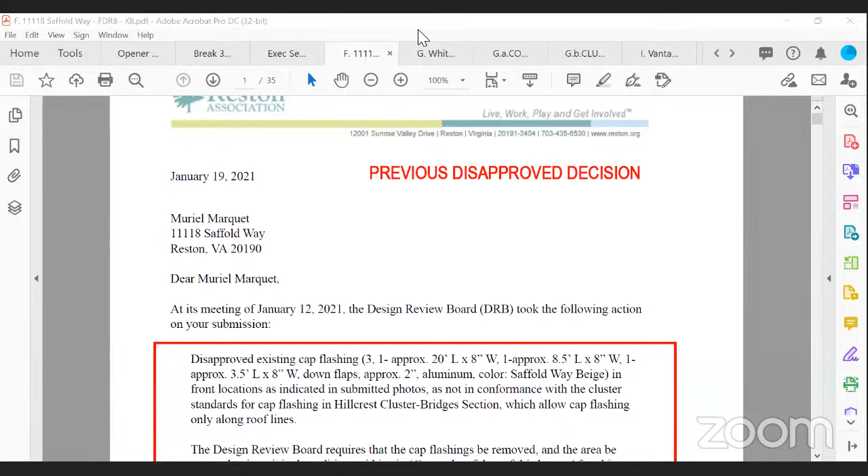The first application is Saffold Way. Is our applicant here? I'm looking for this applicant. Is it an appeal? Yes, okay. As in, looking for our applicant. I don't see her on here. We might want to go to the next one.

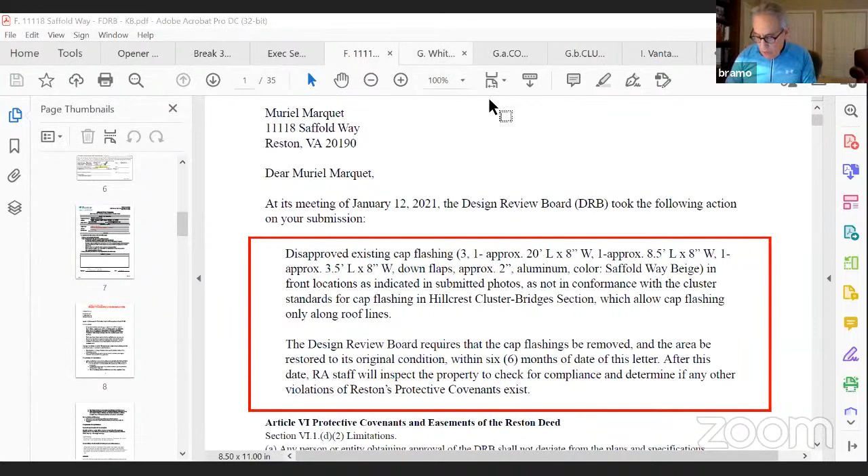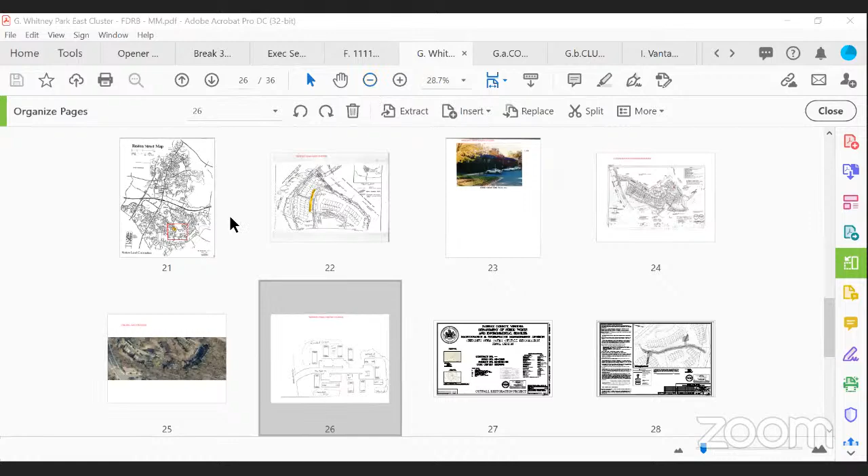Okay, we'll proceed to the next item on the agenda, which is Whitney Park East Cluster Stream Restoration. Okay, we do have the president of Whitney Park East. We're going to unmute her now.

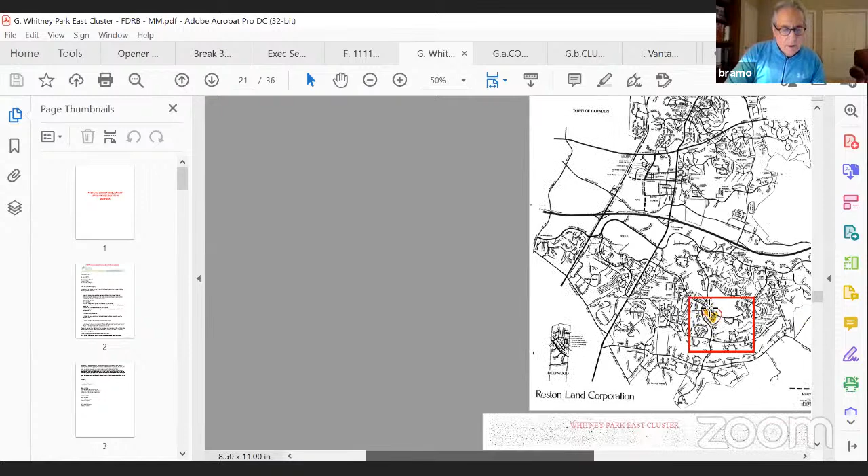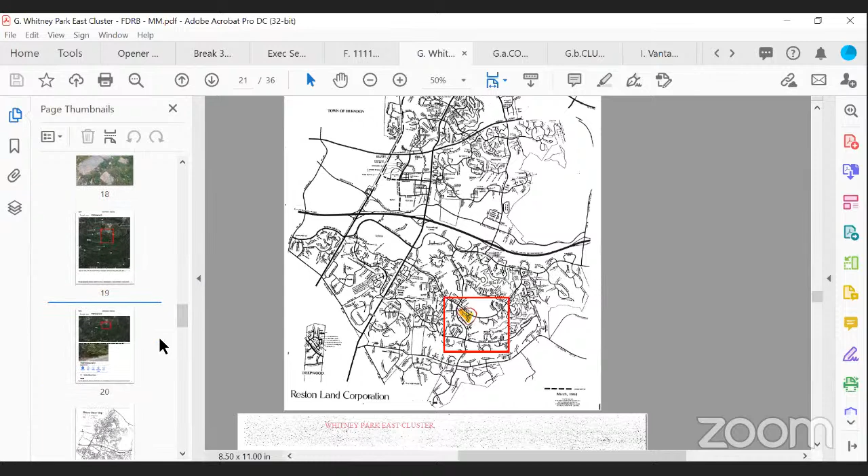Hi, this is Jackie Clark. Can you hear me okay? Yes, very well, thank you. Okay, great. And hopefully Jack Merritt with Fairfax County is also on. He can talk through the plans in more detail, but essentially the application that I submitted with the agreement of 2 other clusters is to allow Fairfax County to restore the creek.

The creek runs between, or on the easement they have between all of our cluster properties. It's been an issue really for the last 2 decades. I think even in the late 90s, the president then went to Reston and asked them to help reduce the erosion happening in the creek. A lot of the backyards of our houses are slowly eroding into that. And while this Fairfax County solution won't fully fix that erosion problem, it definitely helps the erosion of the creek.

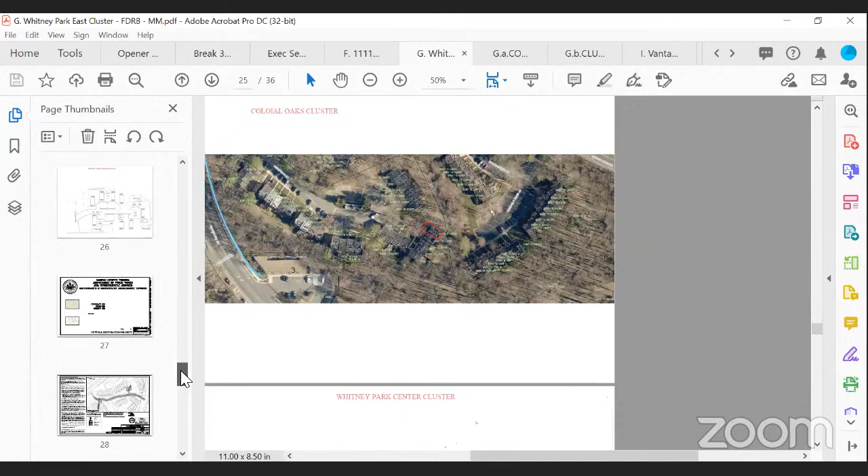It also will address some dangerous trees that are in the creek that in the past have fallen on houses or damaged property on the slopes of the creek. So hopefully it will make it safer and reduce erosion behind all of our townhomes.

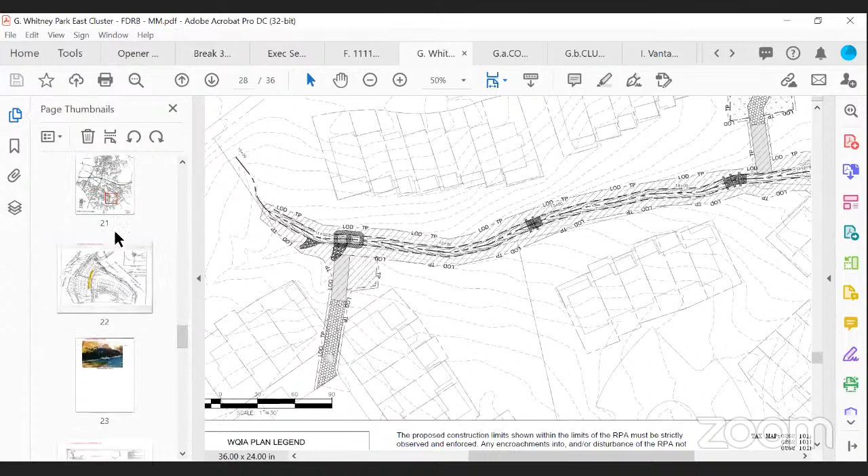You said there's going to be a representative from Fairfax County to kind of walk us through the plan? Yeah, if you can unmute Jack Merritt - he's unmuted. Hi, Jackie. Okay, yeah, I'm unmuted. Thank you all for having us tonight.

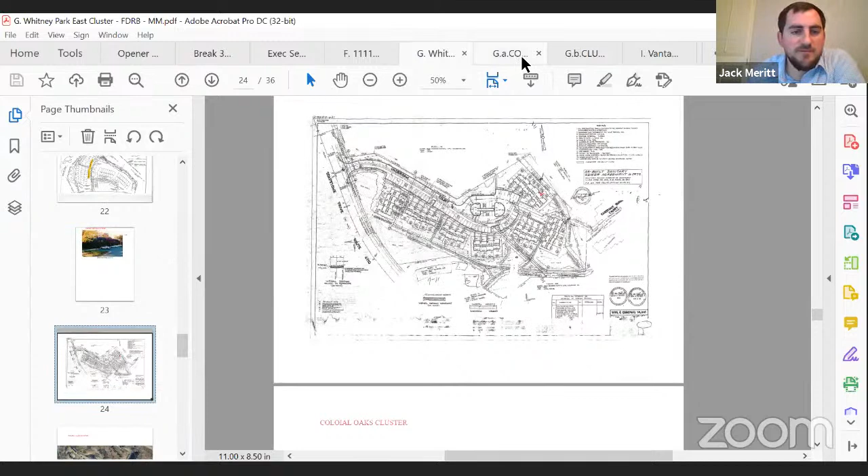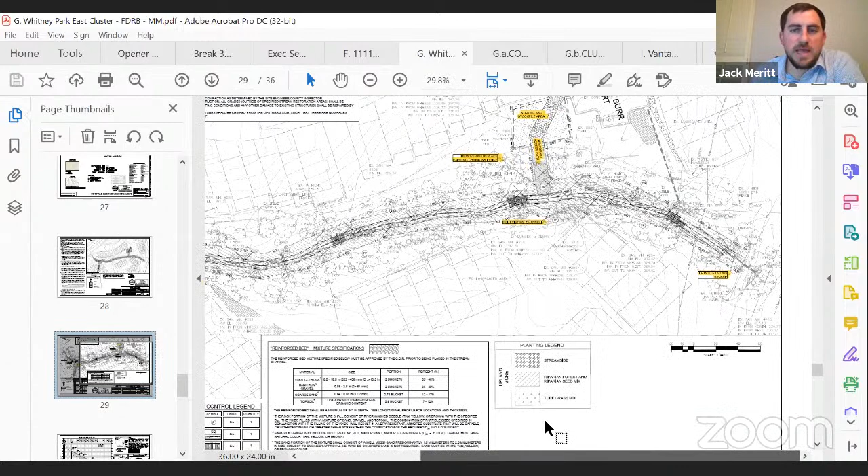If you scroll down a few pages there, I saw it a second ago. I think it's page 29, the next page. Yeah, so if you pan over a little bit more to the right, our proposed access is going to come off the end of Chestnut Burr Court to get into the channel and do the work and access the channel. We are proposing access to run up and down the channel to minimize impacts to existing trees.

We started our engagement with the community back in 2019. We coordinated and consulted with Wetland Studies and Solutions. They're also on the call this evening to do a design project for this channel.

As Jackie mentioned, there's a storm drainage easement along this channel, and this outfall restoration program that we have is part of the county's stormwater program. So this is fully funded through the real estate tax assessment and the stormwater fund that you all pay into.

WSSI surveyed 259 trees, 4 inches in diameter and greater, as part of their survey and topographic survey when they did their initial data collection in the field. We're proposing to remove 41 of those 259 trees. Most of those trees are what we would consider hazard trees, or will become hazard trees because of the construction. I know that tree loss has been an issue along this channel because of the erosion, so we've obviously taken that very seriously as part of our coordination and design effort.

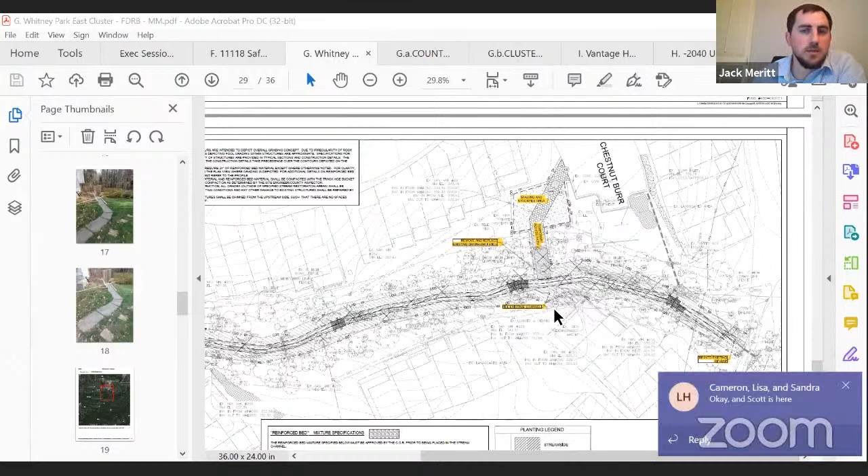Did WSSI do the initial work? Was there initial work, or is this a fix up of something already done? The initial work would have been done as part of the subdivision development, so this would be, to my knowledge, the first restoration effort along this channel.

I live in a cluster that they remediated our stream, and they did a beautiful job. So I think we're in good hands. Was that WSSI? Yes.

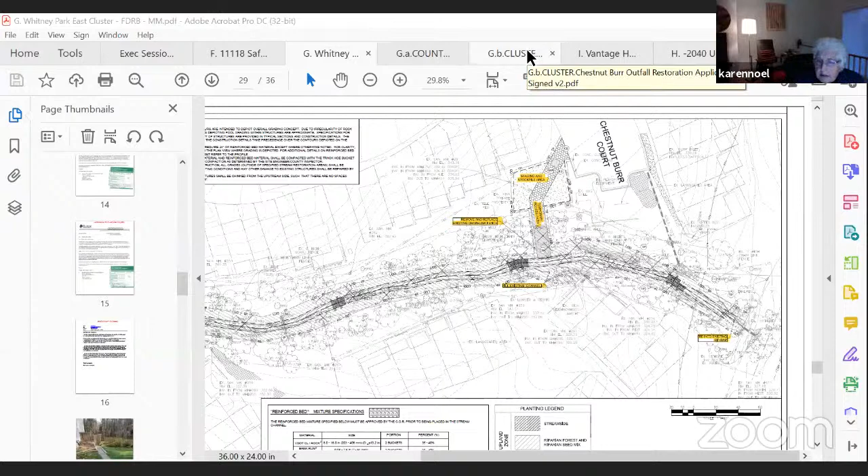This wasn't part of our original restoration in Reston, but we did take the same approach and methodology that we used at Waterview cluster behind your place. Following the restoration, everything will be revegetated with the native seed mix and 1-gallon and tubeling trees as well.

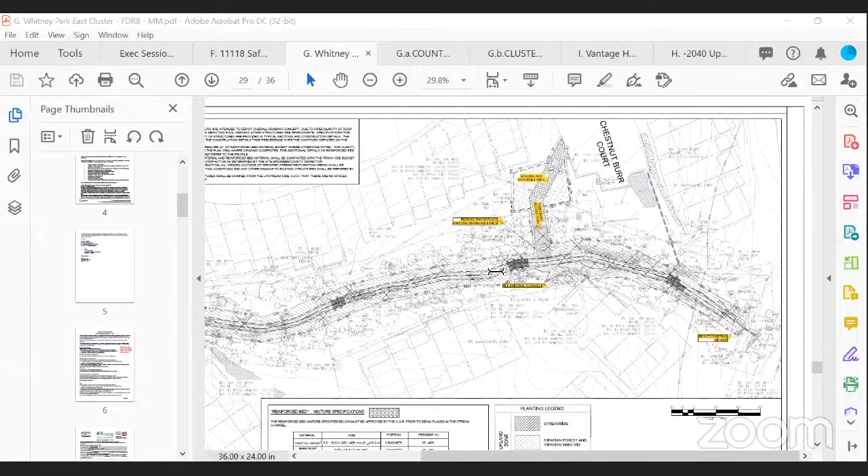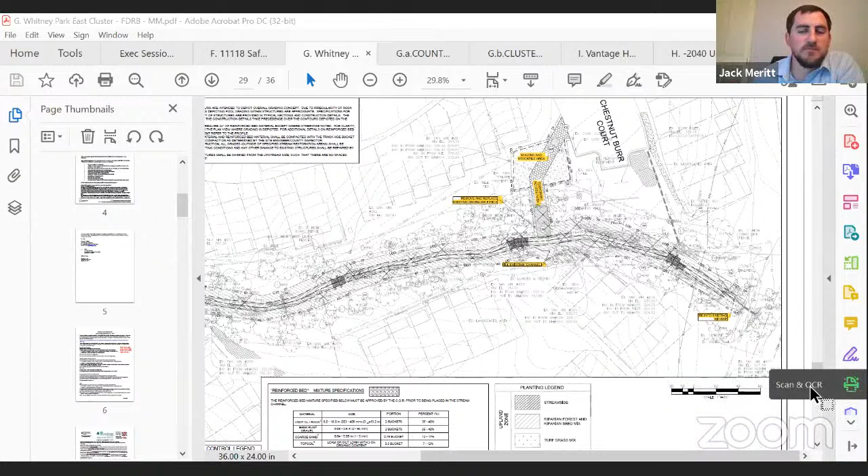How long a project is this, timing or length of construction, from start to finish? We're proposing to restore approximately 650 linear feet of outfall channel. Construction duration should take approximately 2 months.

Forgot to add that we have coordinated with the other 2 clusters whose property doesn't necessarily encompass the channel, but they're adjacent to it and close enough that it's going to have an impact on them during construction. We've engaged with them and held several community meetings to keep all community members engaged in the project.

So right now we're just looking at one piece of it, right? You're looking at the whole project. I'm looking at the whole project. Maybe if you zoomed out another click or two you could see the whole thing, but I look at it on my computer and it's in pieces.

Just for clarification, the application is for the full approximately 650 linear feet, is that correct? Yes, sir.

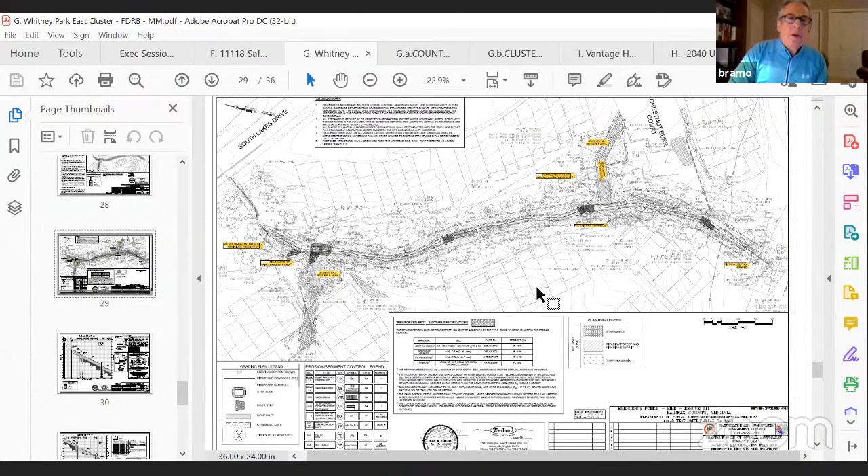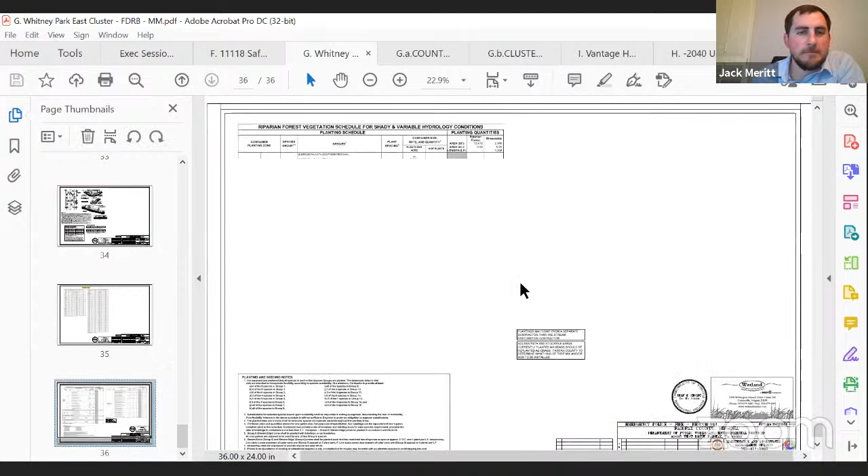Just a point of clarification, you had mentioned there would be revegetation. I think I saw a planting plan at the tail end of your package, and you said you were coming back in with native species, et cetera? Yes, sir, that can be found on the last page there, the next sheet, 36. There you'll find our seeding schedule and our planting schedule with the native trees and shrubs that will be installed post-construction.

Wonderful, and I missed it in your original discussion points, you said total removals were on the order of 40, is that right? Total removals on the order of 41, and then revegetation is 453 stems.

Wonderful, thank you very much, appreciate it. That's so that you would hopefully have an appropriate number left over after some of them don't make it. Correct, we do plant at a higher density due to natural mortality.

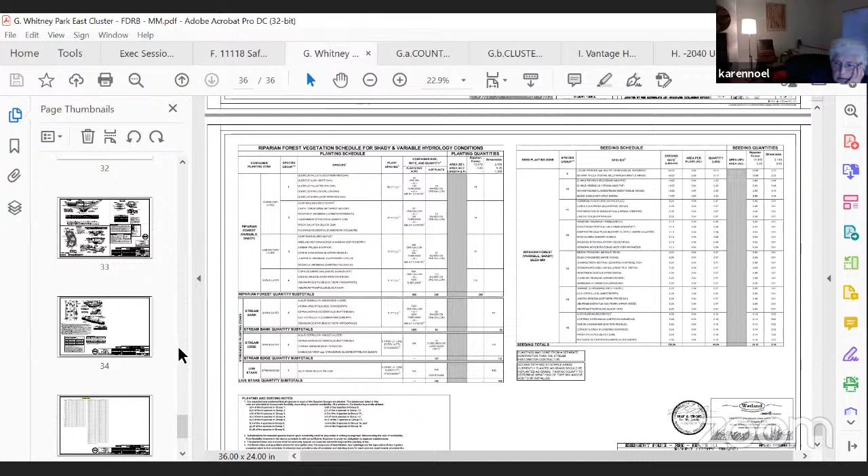This is not a stream restoration, but do you still have 10 years to follow it, or? This is not associated with the stream mitigation bank where we had a 10-year obligation to maintain, but Fairfax County and Jack's group, they do an annual program.

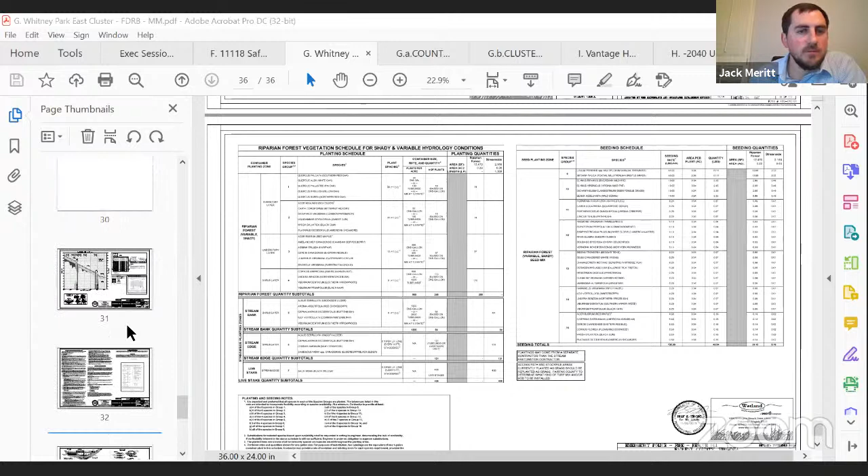So I manage the outfall restoration program as part of Department of Public Works and Environmental Services' Maintenance and Stormwater Management Division. We do have a Corps of Engineer permit, so we'll have a 3-year obligation per our permit to make sure that we meet all of the permit requirements. After that, the project will enter into our maintenance program and we'll maintain it in perpetuity, similar to how we maintain a pipe system, a structure, et cetera, that's within county easement.

This program is not the same as the mitigation bank for Reston. Yes, I understand, thank you.

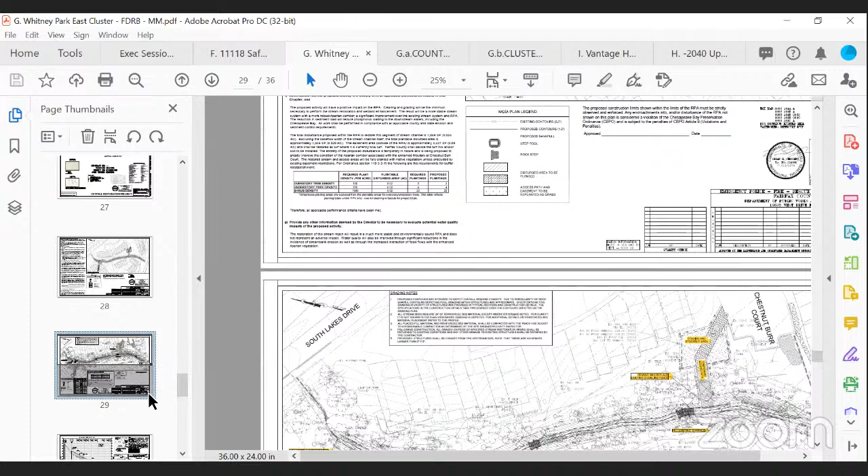If you look on slide 29, the main overview, particularly the left side, it's the secondary storage and staging area where equipment will be stored. So if you scroll down to it on the left side there, that's going to be right between two of our houses, and I think it was on slide 17 where we actually had some of the pictures that we took.

So we were a little surprised when the lines of demarcation went up, because we'd moved in May, and nothing about this project had been relayed to us. But if you can see from slide 17 there, the fencing that will go up for that staging area will completely block our access to our backyard. For normal day-to-day stuff like lawn and garbage going in and out, it prevents that. But more importantly, although less likely, that's our only way in and out of there, so in case of emergency we wouldn't be able to get in and out of the backyard.

Secondary concern is you can see the stone pathway there, which will lie in the area. I'm not entirely sure the type of equipment that will be staged there, but if it's heavy lift equipment, there could be potential damage we'd like to see or hear discussion about how that might be mitigated or repaired after the work is done.

Yeah, so that access point—Brian, thank you for the questions and concerns—that access point is not going to be used on the project. We had left it in there as an option, because where we're accessing up and down the existing channel, we didn't know if the contractor would be able to get in and do all the work from the downstream access. It's not anticipated we're even going to plan to use that access. It's still on the plan as an option in the event that we need to.

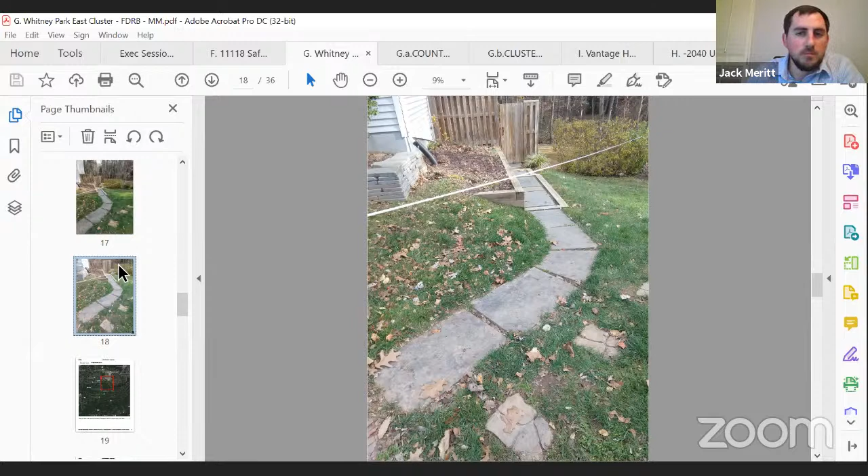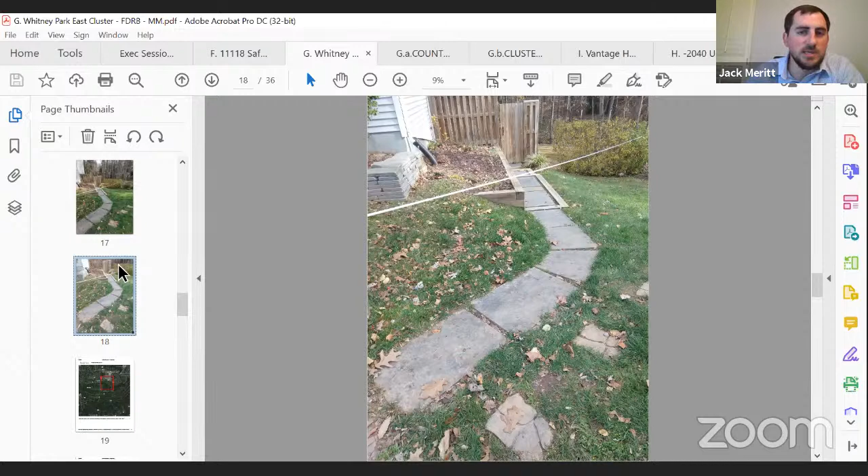We do have a storm drainage easement that cuts in between your house and the adjoining block of homes. Typically with something like that, we're very mindful of your property and your home. So if we needed to use it, we would be flexible and able to adjust that area of temporary fencing to allow you access in and out, and we return any disturbed areas back to how we found them. In this case, the stone pathway would be replaced if something were damaged. Again, it's not anticipated that we're even going to use this as an access.

Okay, yeah, I mean for me, as long as you guys are willing to work with us for access to the back area and that any damage will be replaced, then I think that addresses any concerns we have with this. Thank you. Are there any other questions for the applicant?

Mr. Chairman, yes, my name is John Farrell. I am the president of the Colonial Oaks Cluster. We're one of the two adjacent homeowners associations. We support the application and ask the DRB to approve it. The undercutting of the banks has prompted us to take down some trees that were undercut because of erosion of the banks. We got approval for that last summer.

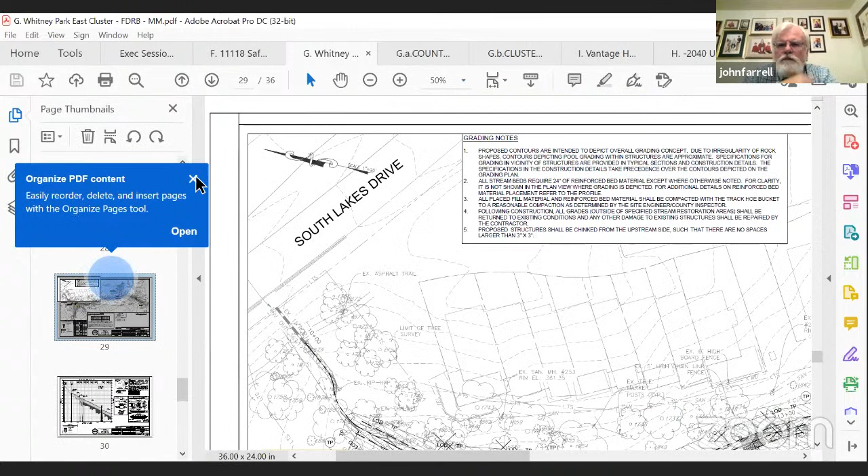And the undercutting of the banks—if we can go to slide 29, pull in tight—it's actually starting to erode the bank to the point that, and the relevant homeowner is actually on the call, we can slide to the right a little. There you can see the yellow highlighting, and just to the right of that is where we had to take down a tree, where the bank is cutting pretty close to our unit owner's home foundation. So we see this project as essential to preserving property values of our cluster in general and that homeowner in particular. We would encourage the DRB to approve the application.

Thank you, John. Any other comments or questions? I would entertain a motion.

Brian, I'll raise just one thing we've noticed. I think I heard there was somebody from a wildlife organization dialed in. We've noticed it looks like there's a breeding pair of foxes living down in there, and we see what might be a den. I don't know if they'll need anything done on the wildlife end to work around that, but just wanted to raise that for everyone's awareness.

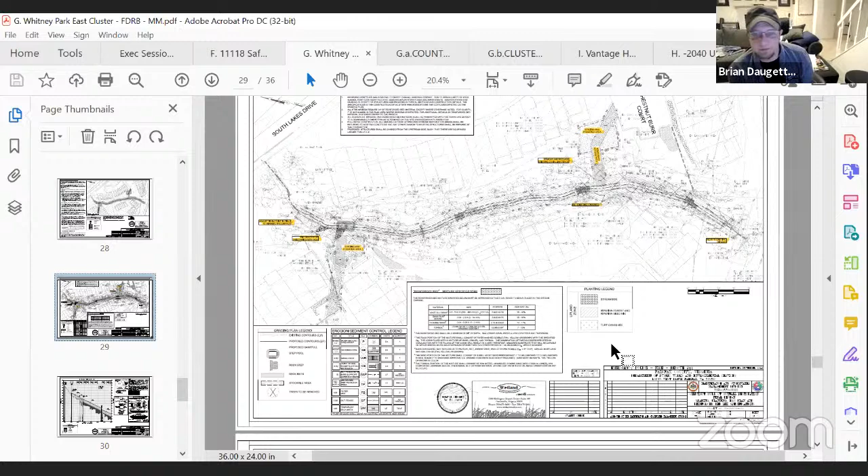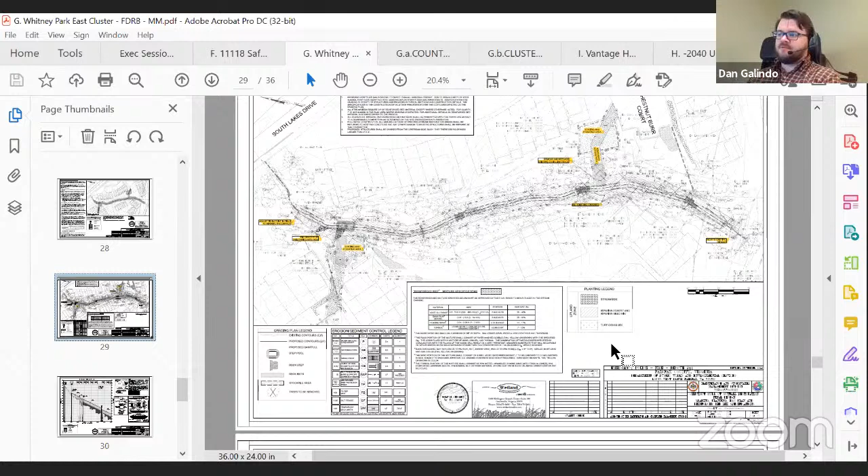Thank you. If there's no other questions or comments from the panel, from the full DRB, is there a motion? This is Dan Galindo. I will move to approve the application as presented.

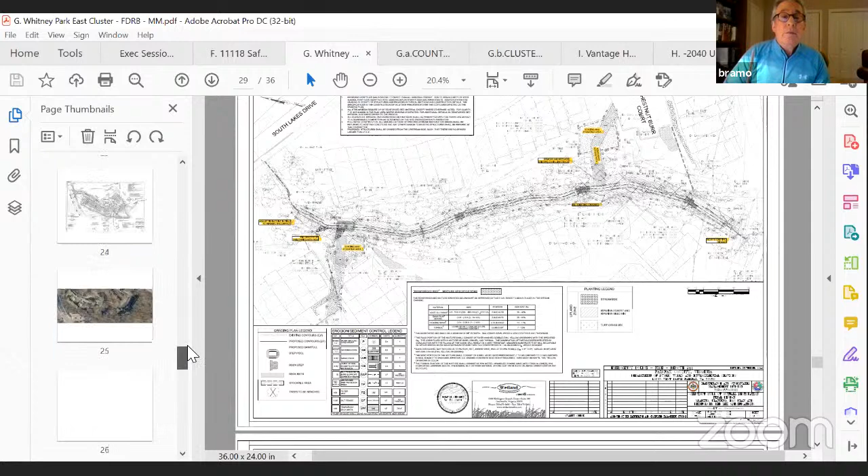Is there a second? Second. Would you consider a clarification regarding the location of the fencing to enable access to Delgado's property, with the understanding that if there is need to repair damage to the walkway or the patio, that would be addressed as well by the applicant? Yes, we would work with the resident there to make sure both items were addressed.

So the motion and the second, would they consider those? Sure, I'll accept that friendly amendment. Yes. Great. Any further discussion? Hearing none, all those in favor, please say aye. Aye. Any opposed? Hearing none. Any abstentions? Seeing none, then the motion is passed.

Thank you all. Thank you for that presentation. Good luck with the project. Thank you. Thank you.

Next up is the Lake Thoreau Pool. So before we get to the Lake Thoreau pool, Bruce, just a note that the first application item, I believe the DRB may need to defer until the applicant and the affected party are present.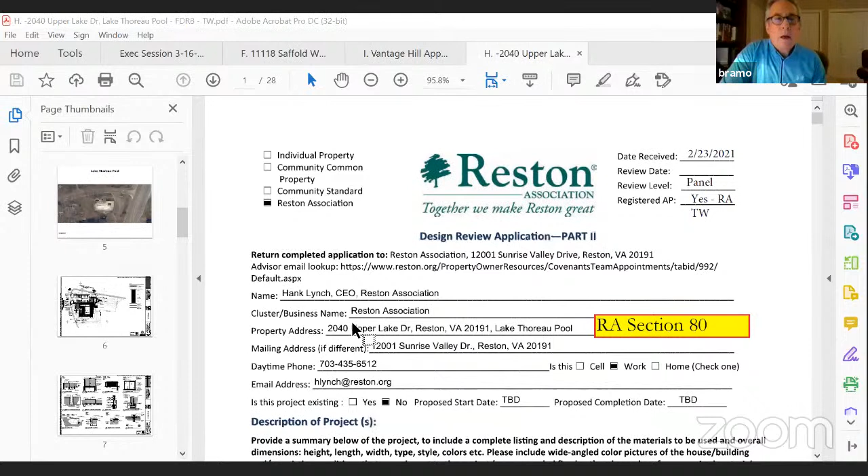Okay, I so move. Is there a second? Second. Any discussion? All in favor? Aye. Any opposed? Any abstentions? None, hearing none, the motion is passed.

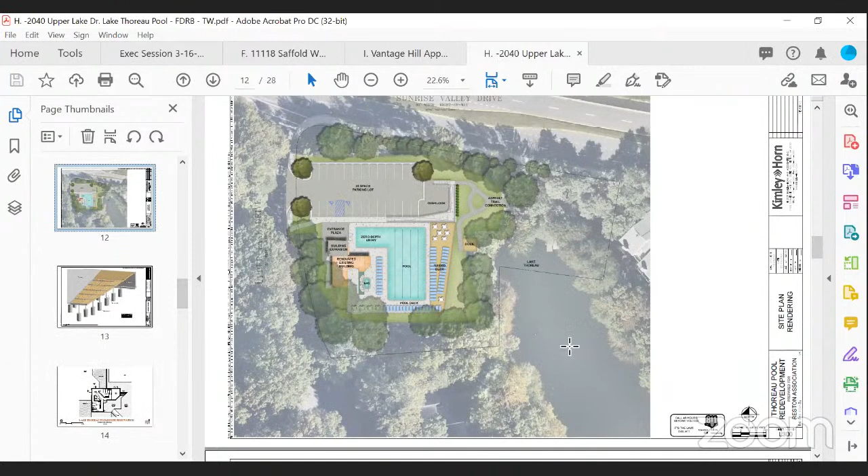So now we're ready for Lake Thoreau Pool. Who will be presenting for this? Larry, he's on meeting. Thank you, I was trying to unmute myself there.

Good evening everybody, this is Larry Butler with Reston Association. We have a rather interesting, I'd say iconic application - these don't come in front of the DRB all that often. This is the renovation, wholesale renovation of the Lake Thoreau Pool over off Sunrise Valley Drive and Upper Lake Drive. I'm just going to talk a little bit about how we got here.

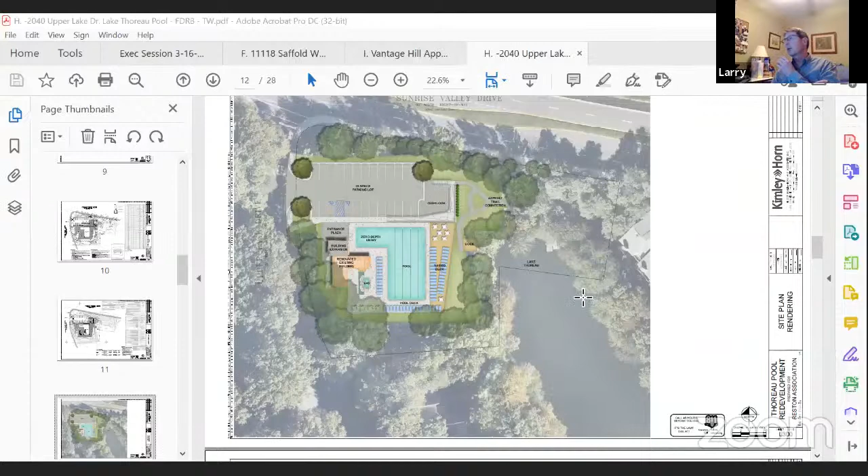With us tonight we also have Chris Shoemaker, our Director of Capital Projects, Ron Kagawa and Jeff Holzer from Kimley Horn, our engineering consultants, as well as Matt Stevenson and Jared Wilcox from LeMay Erickson Wilcox Architects, who are working on the pool building. This is the 5th pool that Reston Association has done a major renovation of. For those who have been around a long time, we've done Glade Pool, Hunter's Woods, Uplands, and Dogwood. So this is the next one in line.

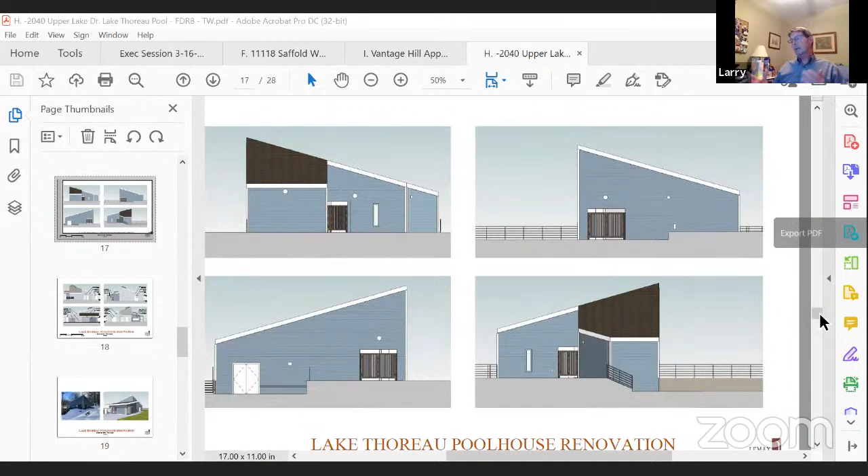I think it's important to note that this project started in 2019. We've had a lot of community engagement, charrettes and so forth. So what you're seeing tonight is a result of boiling down all the information we received over that time period, working with a number of Reston Association members and stakeholders. We want to get your feedback on what we've got here to present to you tonight.

I think, if I'm not mistaken, we're going to turn it over to Jeff. Is that correct? Yes, Kimley Horn. So I would welcome Jeff to commence with the major slide deck that you have before you.

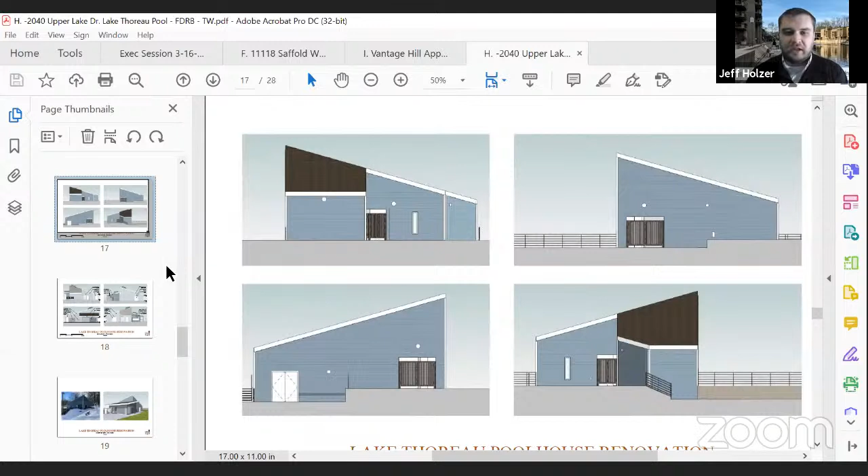Excellent, thank you Larry, and thank you to the board here for taking the time to review this package with us, and looking forward to fielding questions from you and others. So for those controlling the presentation, if you don't mind going to the beginning slide, we'll work through it to get towards the architectural improvements. As Larry mentioned, from community charrettes that started in February of 2020, we evaluated the existing conditions of the site.

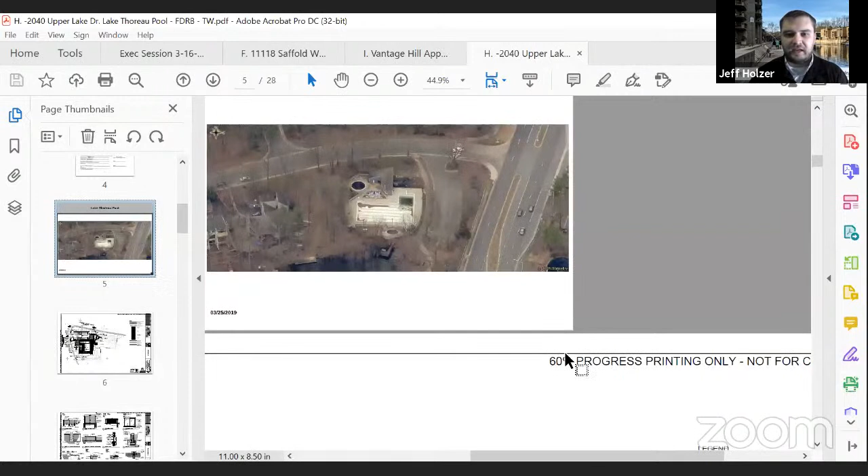There's many physical conditions that we're addressing as part of this redevelopment, in regards to elevation change, RPA requirements, and accessibility is a key issue. And as well as balancing requirements and priorities reflected from the community, we've developed this site plan and package to reflect the improvements needed and wanted by the resident and the community.

We've gone through the summer, through COVID, we pivoted to online charrettes to get a fully vetted design. We worked through that through the fall, and then at the beginning of this year, we've been able to start our drawings to get this to a 50 to 60% level package for your review tonight.

Overall, the Thoreau Pool redevelopment, as I mentioned, is really trying to address the accessibility issues while maintaining the need of an accessible pool and amenities that the community values very deeply.

As part of some additional Fairfax County requirements that we're addressing, we're bringing the property back up to code. In the 1970s, when this was originally developed, it was proposed for 25 parking spaces, and it was reduced to 16 of what is currently out there. We're bringing it back up to 25 to meet the need brought up by the community regarding the popularity of this facility and needing more parking spaces.

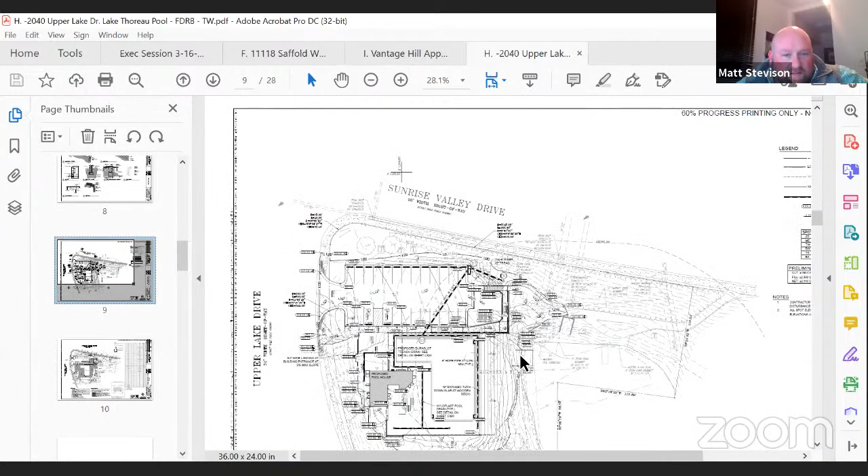Thank you, Jeff. As mentioned, my name is Matt Stevison. I'm a project manager with LeMay, Erickson Willcox, and we're doing the pool renovation portion of this project. If you could scroll down, we've got an existing demo floor plan on here, underneath these details, probably down towards the bottom of the PDF, the one with the red there.

So this is a layout of the existing pool house. Luckily, we were able to find the existing drawings in the RA's archives. It's a fairly strange configuration. There's a lot of dead space taken up by corridors, and these corridors are not meeting minimum clear dimensions for accessibility as well. The women's restroom was also not adequately sized for the fixture counts for what's required for a pool and deck this size.

So as Jeff had mentioned, our program was really to take as much of this existing skeleton of the building as we can, including some of the internal posts that are coming down, the exterior frame and the pitched roof, and develop an addition that would pick up and allow us to expand this program a little bit, and would also allow more space for the pool equipment room, which right now is undersized.

It's actually split between the pool and another outbuilding that houses the equipment for the spa. So if you could go down to the next slide, please. This is what we've come up with, and we've got a larger pool equipment room to the southern end, plan south of the drawing here. It's accessible from both sides with easy egress to the parking area for getting in and out of there, for any sorts of equipment.

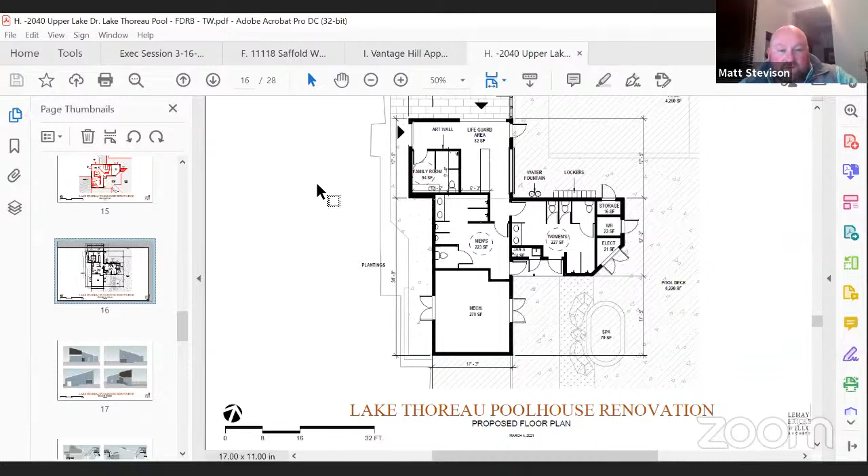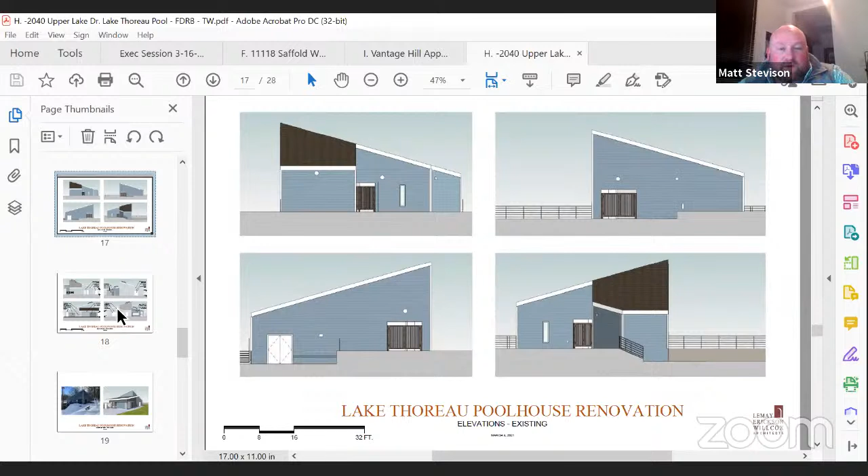If you can go to the next slide, please. So what we're advocating is really to try to pick up the language of the original architecture, both in material and in the idea of this one big shed roof. So we're coming off of the front north side of the property with another shed roof coming down. You can see the sliding doors on 2 of these elevations that provide that nice openness.

They're clad right now with the same sort of fiber cement siding that you would see on the existing building and on the proposed addition, although there have been some talks about possibly doing that in a nice wood or something to warm it up a little bit. The trim is going to be all white trim, shingle roof, just exactly like the existing building there. So our charge was really to create an architecture that was going to work with what was there.

You can also see some of the other features I mentioned, this roll-up window, which allows visual access from the pool deck back into the lobby area. There's some lockers outside, drinking fountains outside.

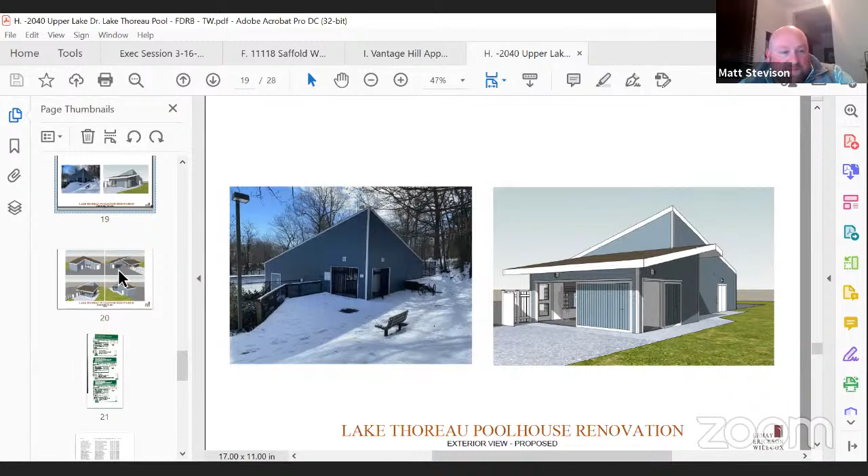And then we're going to get into just a couple details. So this is a side-by-side of the existing condition and then the new condition with the addition tying back up in there. And then the final slide that I've got is just some perspectives from the corners, and you can kind of see how the geometry of this new addition works with the existing geometry of the building.

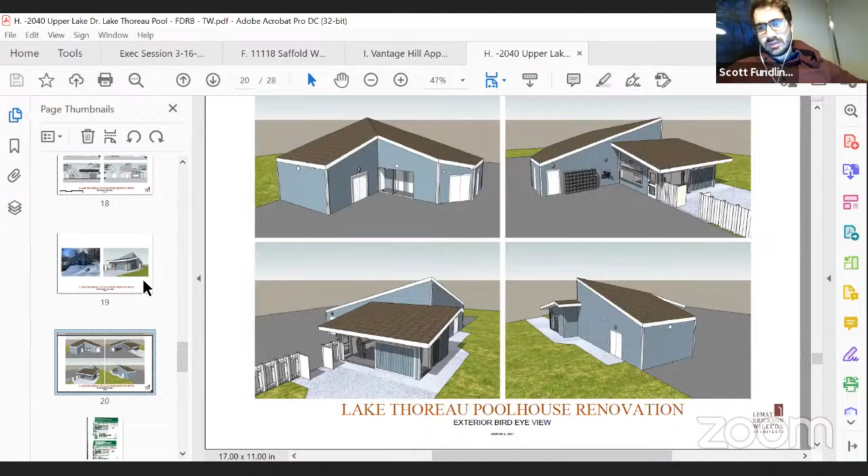Thanks, Bruce. So Lake Thoreau, as it currently stands, I think you have the parking and the existing structure generally on the same elevation, and then there's a ramp that takes you down to deck level. So what that deck level is now being elevated to -- is the finished floor of this addition or the interior improvements of the pool being changed? The interior finished floor of the building will not be changed from what's existing. The pool deck and the parking is what's going to be lifted to meet that elevation.

So I guess that grading -- is there a retaining wall about the perimeter of the pool deck, or is the site being regraded beyond that at the property line? It's a good question. Thank you.

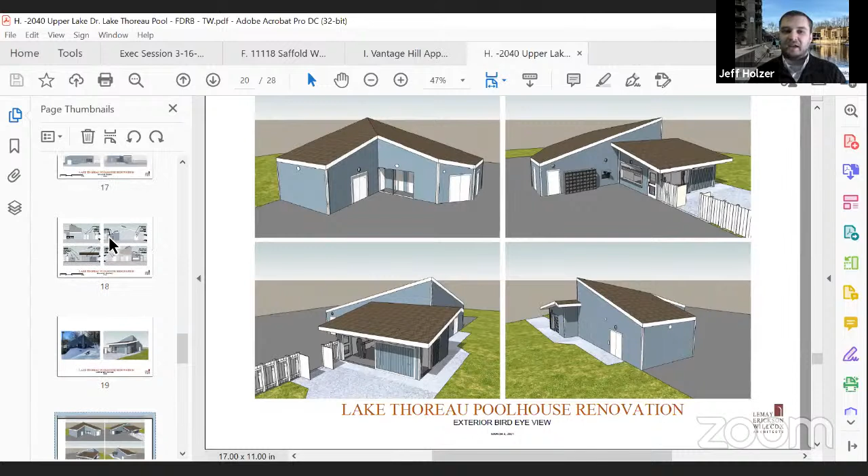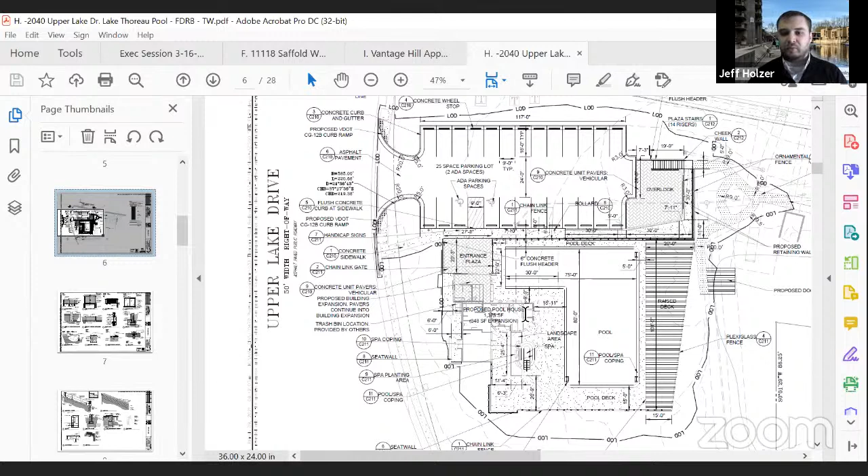The grading can be extensive as part of this project. Around the parking lot, we have retaining walls that envelop the overlook, as well as support the ramps that surround that overlook to get back down to grade. On the pool side, though, current plans -- because we were able to essentially peel that pool deck level back west, and ultimately in that space where currently the terrace lawn and the spa is located -- we're able to slope that hillside at a 3-to-1 slope and tie back into existing grade as it is today. So for that pool deck portion on the east side, we don't need a retaining wall. We'll have a reinforced edge on that side, but not a retaining wall. We had anticipated that to be a retaining wall in initial concepts when we worked with the community through the summer, but through our grading and engineering, we've determined that a 3-to-1 slope can be accomplished without a retaining wall on that side. So that slope would be underneath the raised deck portion here on the site plan.

Okay, what's going to be the finish of those retaining walls? Currently, they are concrete, but we're looking into decorative facade finishes to give it more of a character rather than a typical flush kind of finish.

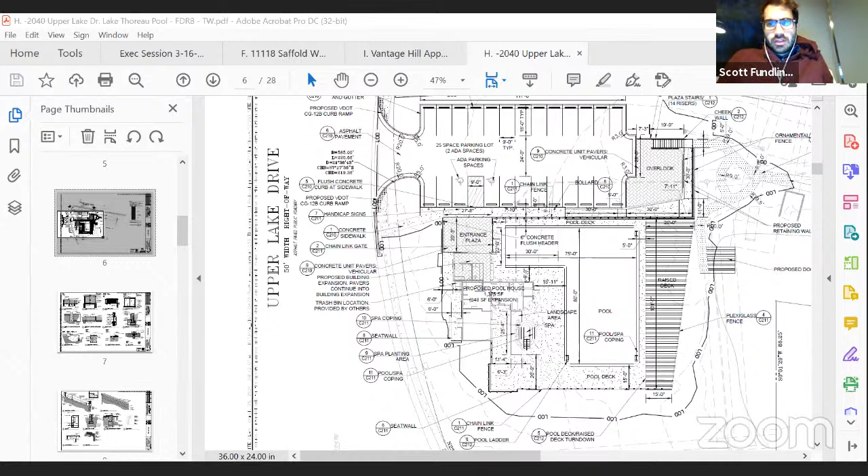Yeah, because the existing pool, when the siding ends, I'm pretty sure it's just a cast-in-place concrete exposed wall that is essentially like a large curb. Okay, I was just wondering because, to be honest, when I heard you talk, it seemed expensive, like the amount of grading. But I think with what you're saying, it sounds like you guys have studied it.

The second question I have is about the building expansion. I'm sorry, but the roof -- it looks very different in geometry, form, and footprint from the existing, because you have a peak at the northwest corner of the building that then diagonally slopes southeast, but then you have a mono pitch roof for the addition that doesn't match the height of the peak. If you go to the roof plan, that was one other question.

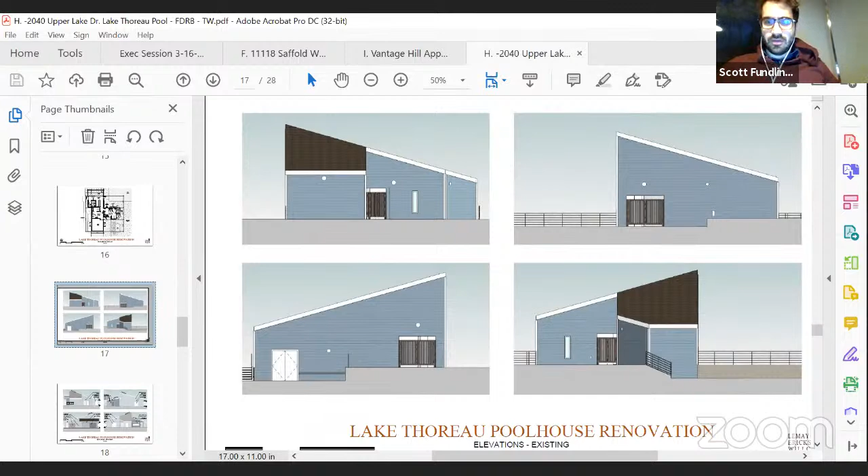So this is perfect. So you have the roof, and it kind of goes from northwest to southeast. So I guess my question was, if you matched the peak and then went from northwest sloping northeast, it almost seems like you'd be matching roof levels and fitting in better. That's kind of a question.

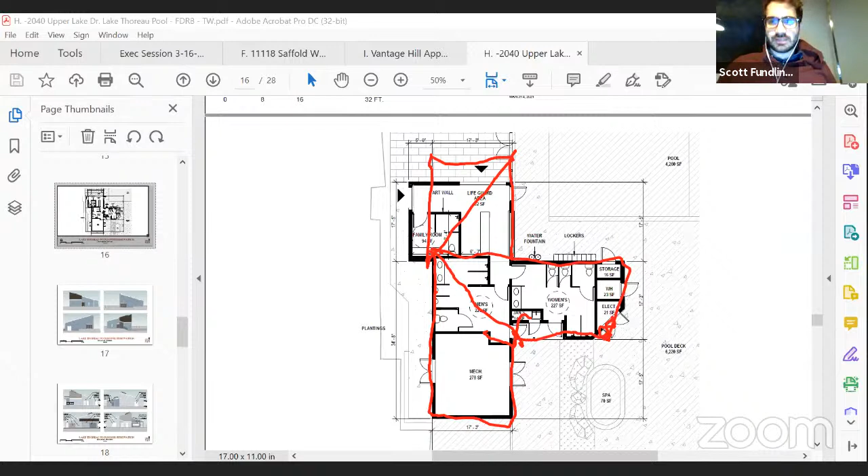It goes back to some of the last 3D renderings that you presented, Mr. Stevens. Sure, Scott, we did actually look at that. Actually, can we look at the slide with the 3D renderings on it?

Actually, one more down. So we actually did study what that would feel like if this new addition were to have basically come up and meet the peak of the high point of that roof and come down, and then it could basically be like a gable, something sort of like that.

It felt a little heavy to me, although I see where you're coming from. I'm just like, this doesn't align with that, and the building is very... I understand these sort of really monolithic buildings are interesting to work with. It's probably a diplomatic way of putting it, but...

Again, just a question. I think it's something that, because I know we actually have it in our Revit model, a study where we have that coming up and meeting that peak. So we could provide that. When we did it and looked at it, it felt a little bit heavy to me. But I do understand your comment, and as the design continues, we'll study just exactly how that geometry is working up there.

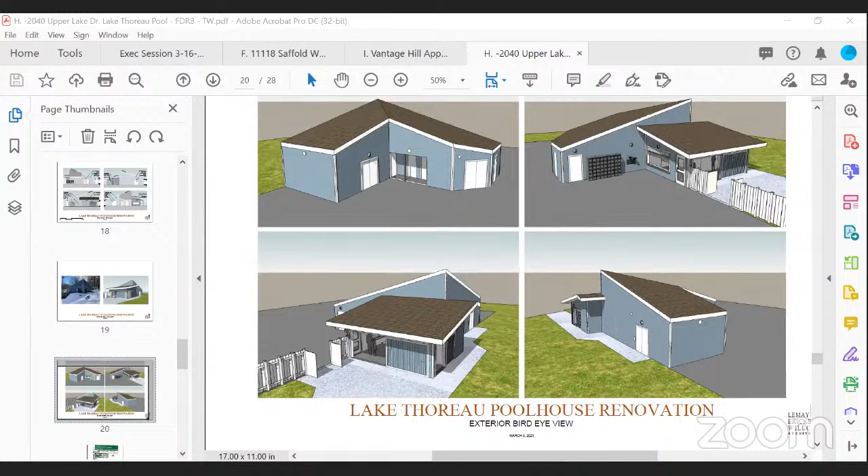I guess my final question I had was about the existing corridors of the existing pool. It's a good point, they probably take up like 15% of the floor plan, so it is kind of a big hit to take on efficiency. But I think it's because most pools in Reston have these quote unquote airport bathrooms where you don't have doors, but instead you have long corridors.

I guess my question is more about the doors and the hardware you plan to use for the bathrooms, because I can imagine these are going to get a lot of use and abuse, like this building was from the 80s. So ideally we're planning this out into 2040, 2050. So that was another question I had on the interior.

Valid question. We have not spec'd doors and hardware yet, but understanding that need and the amount of use these are going to get, we can make sure that what we do spec is something that's going to be very hard wearing and have a very long life cycle.

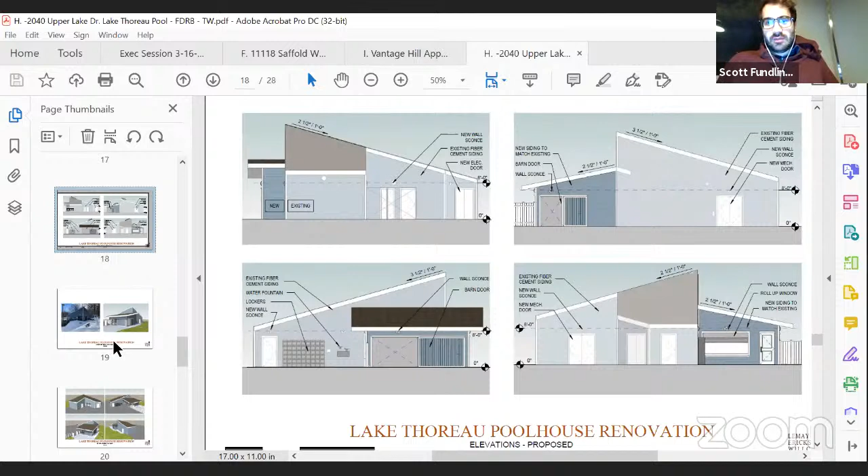Yeah, it's tough too. I mean, sorry, keep going with questions, but the current building doesn't have any HVAC, it's totally open air. Is that another thing that can be challenging with hardware and hinges? Is there going to be any, I imagine not, but correct me if I'm wrong.

Not is the correct answer. We're not planning on having this be mechanically cooled or heated. I'm sure we're going to need a ridge vent, and there might be a fan up in the peak of the roof to pull out the hot air. But other than that, we're not planning on having any sort of mechanical heating or cooling.

I don't know, it'll be interesting to see in the summertime, because the existing building has no doors, it's open, so air just passes by. When it gets hot in the summer, it'll be with no AC. I don't know if you guys have studied that or if your MEP engineers have done any analysis, but again, I don't have an answer to that. That's just a question and more a curiosity I have.

I think it's something we can continue to speak with our MEP engineers about, but our direction and what we've heard is that this is a pretty typical condition for all of the pools in Reston to be essentially open air. So we'll make some accommodations to ensure there's airflow getting through there, but we have not designed this or planned on having it mechanically heated or cooled.

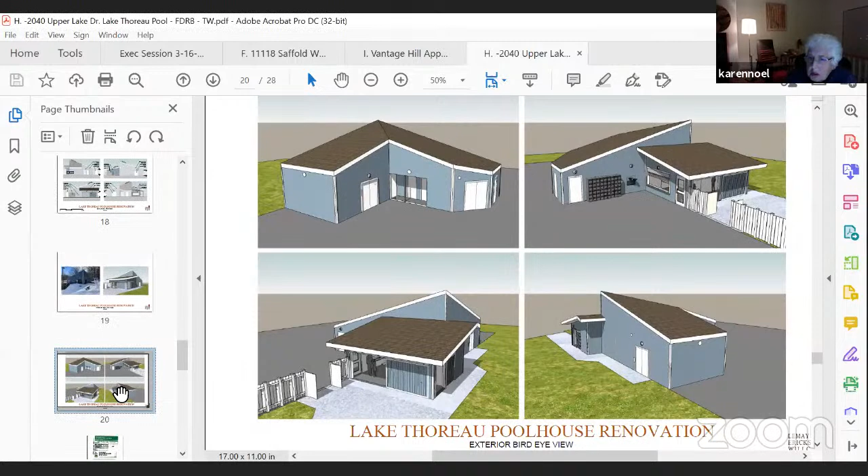Thank you. Karen? Yeah, I agree with Scott's comments about the roof and also about the doors. The doors seem very constraining. Imagine you've got two kids with you and you're trying to get through a door with clothes and stuff, whatever it is. Anyway, it just feels constraining. So that would be a concern of mine.

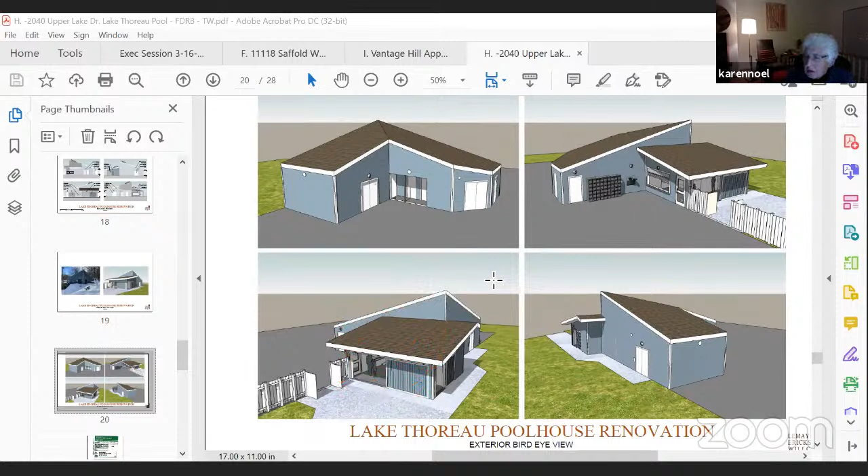I think those are my biggest concerns. I would like to also understand the deck on the outside that looks like it has slats. Can you go down to the colored site plan, please?

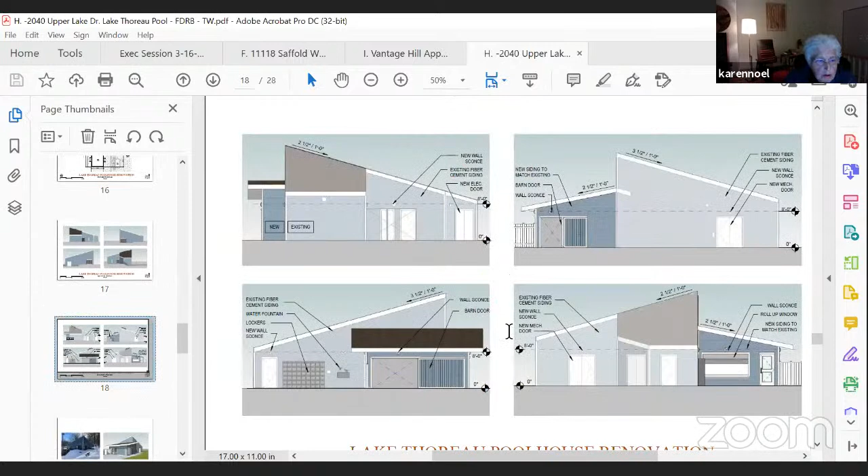It's probably up higher, further there, up the slide 12. Okay, so I understand the overlook and how that's all working, and how the pool, you've put everything on the same level, which I think is a really helpful change. I'm just not understanding this kind of long triangular raised deck. I understand the raised deck, but I'm not sure what the level of it is. I understand how you get to the overlook and back down, but I'm not sure how that plays into the raised deck.

That's a good question for me to clarify. So the raised deck itself, this portion on the site plan that is a brownish color with some blue squares on it representing the chaise lounges, is interior to the pool facility. So the pool code required fencing would go around the perimeter of this. You would only be able to access this raised deck by going through the building into the pool, so you'd be checked into the pool facility, more or less.

If you go to slide 13, there's a diagram of this raised deck with more detail. Ultimately it's going to be a steel structure with wood joists and planking on top as the deck, but that's all still the same level as the pool deck itself. So you'll be able to walk out of the locker rooms, walk past the pool, and it's all one level that will butt into this raised deck, where there'll be some additional seating availability.

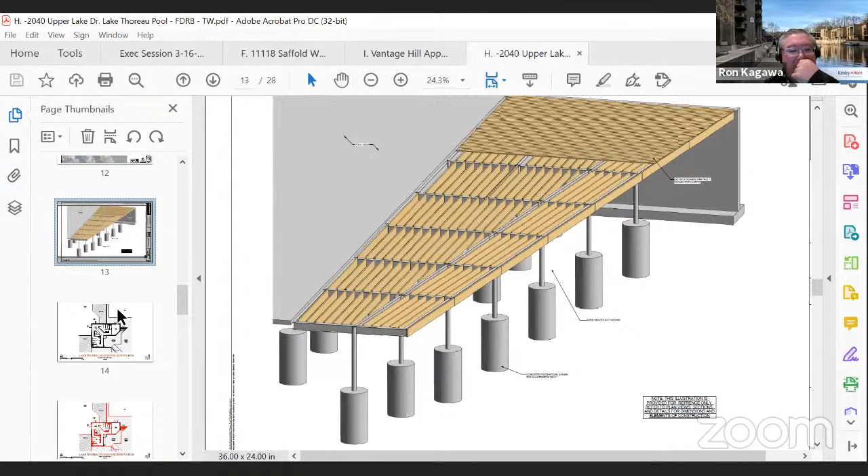Jeff, this is Ron. Show on the site plan where the perimeter of the deck is located — that would be helpful. It will be the east side of the raised deck, the side adjacent to the lake, the angled portion of that side. That will be the glass fenced portion of the perimeter. So what happens at the bottom, where it looks like all that furniture smashes into each other?

So the narrowest point of the raised deck portion is 15 feet. The arrangement of the furniture can ultimately be determined on site when you're laying it out, but it was more diagrammatically laid out to show that you could fit two rows of seats, one angled towards the pool, one angled parallel to that angled glass fencing to really capitalize on that view shed to the lake. Those chaise lounges are about 7 feet long, so it's a representation to show that you can fit a good amount of seating even in that narrow portion of the raised deck.

So those are all movable? Yes, yes. It's all up to whatever you want to make it.

Is it at the same level as the concrete around the pool deck? Yes, yes. Okay, and just to expand on Jeff's comment, this is Ron.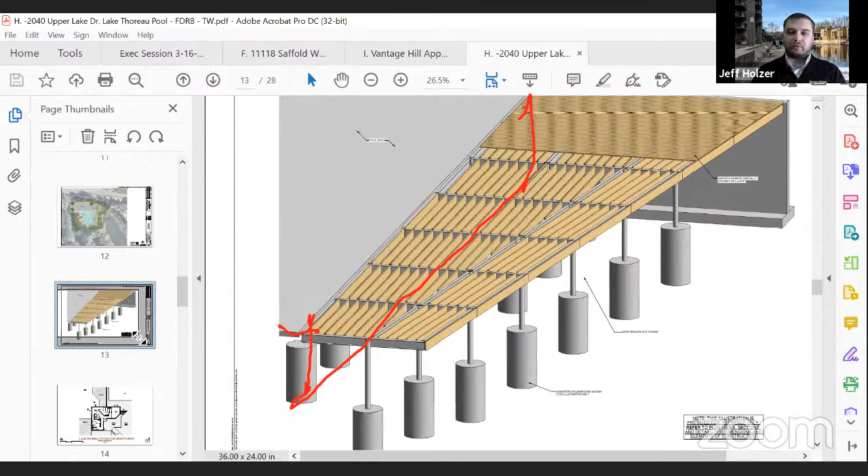Slope, okay. And so you'll have a crawl space when this is finished, and then your glass railing. The crawl space is under the whole thing? Yes. And it slopes? Yes ma'am, you're standing on a slope. It'll be a 3-to-1 slope underneath there to tie back into existing grade, so we won't be expanding the grading or impacting any of the existing trees along that lake edge any more significantly than the wall currently is there. We'll be tying right back into that level.

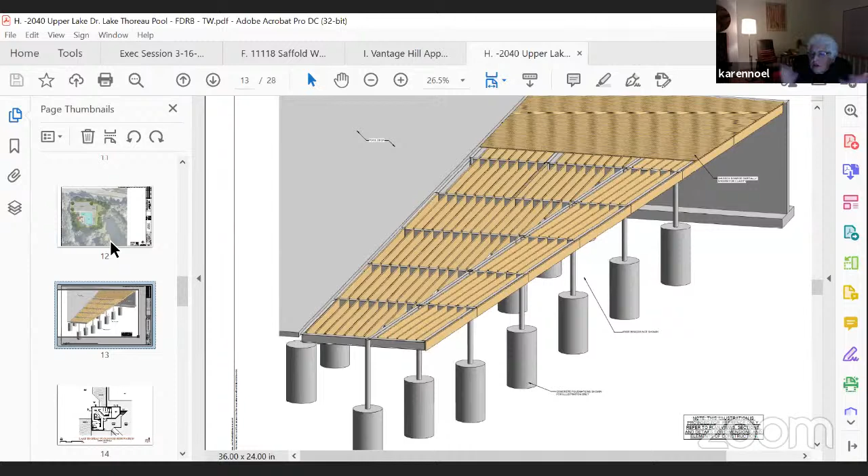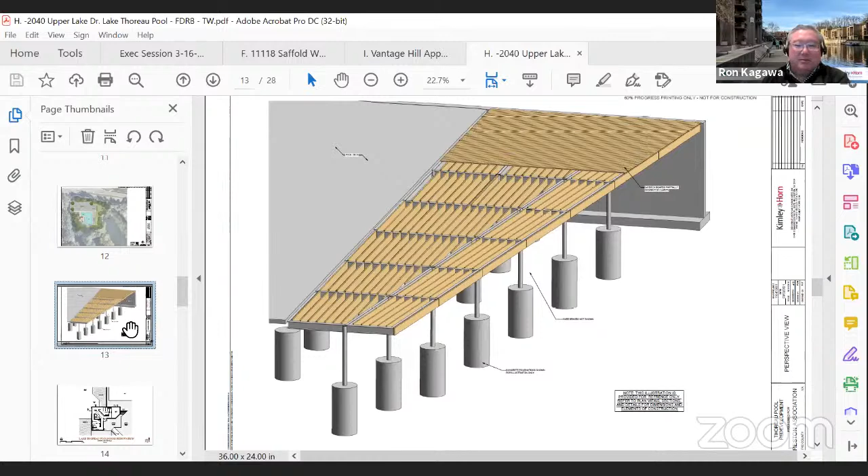Will you be? Oh go ahead. No, you go ahead Karen. I'm sorry, it's all right. So it's open underneath, like earth and mulch and stuff like that? Well currently what we're doing, we're proposing to put flat stones under it with rails so that we can store kayaks and things underneath if necessary. So that gives the opportunity for some residents to actually boat to the facility and store their boat underneath the deck, then check into the pool, and then boat home. What could be better than to kayak to the pool, go to the pool, and kayak home, right?

Well, you have to have some arrangement where they can lock it. Yes, yes, we have some details for tie-downs for them on the slope.

So where do you put all these chairs, the chaise lounges, where do those live when you're not... Chris, do they mostly stay out? Are you talking in terms of the off season? Off season, or I don't know, I'm just wondering if they go somewhere at some point or do they always stay out. During the active pool season they just kind of remain on deck. The staff usually at the end of the evening will reposition all the chairs to get it staged for the next morning. During the winterization process they are stacked and then usually located somewhere in or close to the building, then locked and strapped down for security. So they will not be out on the deck, the main deck area, during the off season.

Okay Scott, did you have something? I guess I had one, on the site plan, I understand we're now meeting code with the number of parking spaces being provided, but the amount of impervious area of the site also, and please correct me if I'm wrong, appears to have increased. So do we have like a minimum?

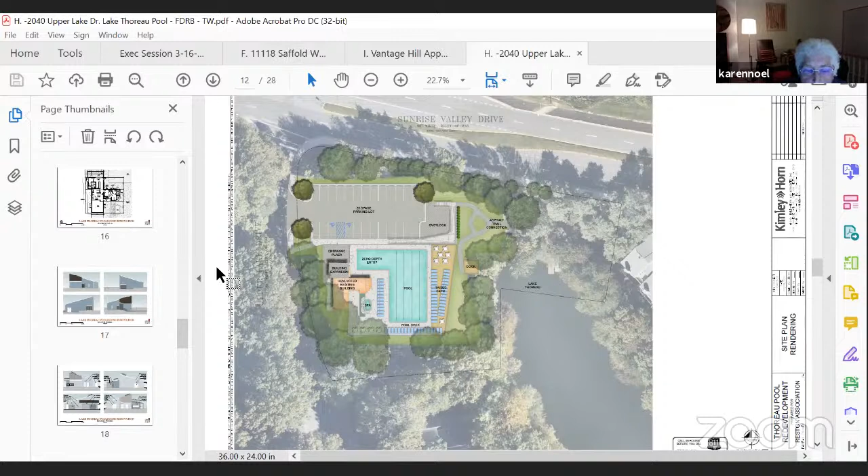I have one other question about how you get from the building into the pool. You come out, through the building, and out where the color changes. I think slide 16 might be the most helpful to walk through the building.

No, I wanted to talk about the outside, but this would probably work. So you come out where the 2 doors are from the locker rooms, or changing rooms, and you've got a spa right away as you come out that door. So to get to the pool, you come out those changing room doors, and you have to walk all the way around the spa to get to the pool.

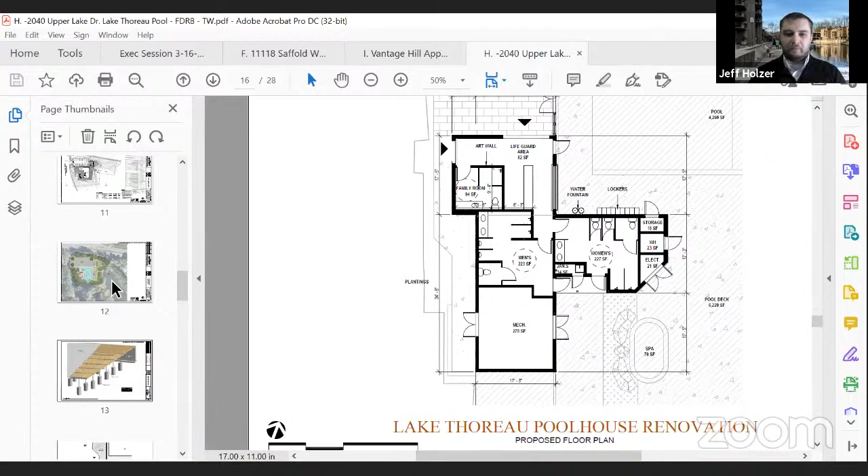Is that how that works? Yeah, once you leave the building—if you go to slide 11, that might be the best one to look at—as you come out of those locker room doors, you'll walk south and then turn east, making a left-hand turn as you're walking, and that will get you out onto the pool deck.

The additional landscape strip there around the spa was intentional, one, to help minimize screening of the mechanical room positioned on the southern portion of the building, but also to give a bit of a sense of privacy around that spa area, amplifying a bit more of that current condition where they have their own kind of enclosure space. We're trying to be true to that idea, but in a more natural, featured component.

So, but wouldn't you want to have the people coming out and going to the pool not having to walk behind you and all the way around?

We can take a look at that. I just passed through and thought that—it was curious, not a criticism. No, exactly, I think that's a good comment. It is, that's a fair comment. It's a good comment, and a good perspective, and it's ultimately a good essence of why we're here—to get some additional input on these sort of things as these plans develop. We will take a look at that.

One thing to note, Karen, when you get in the pool, you get in at a zero depth entry. It's like a beach. So then you've got to go from the doors, or do you go back?

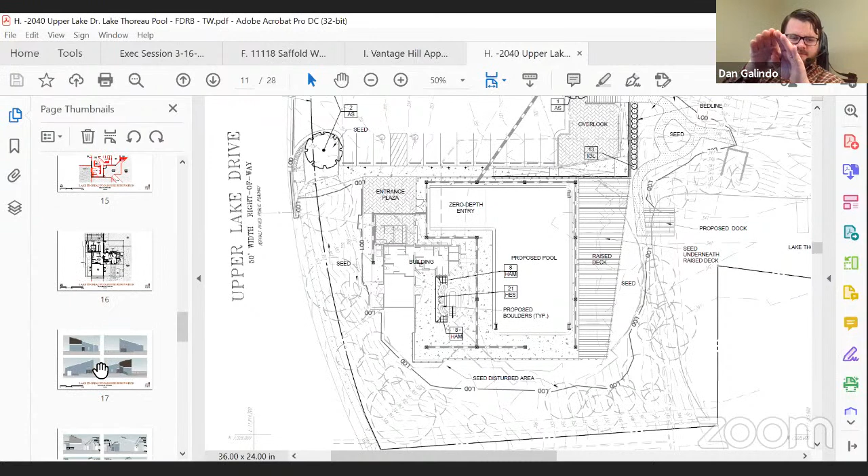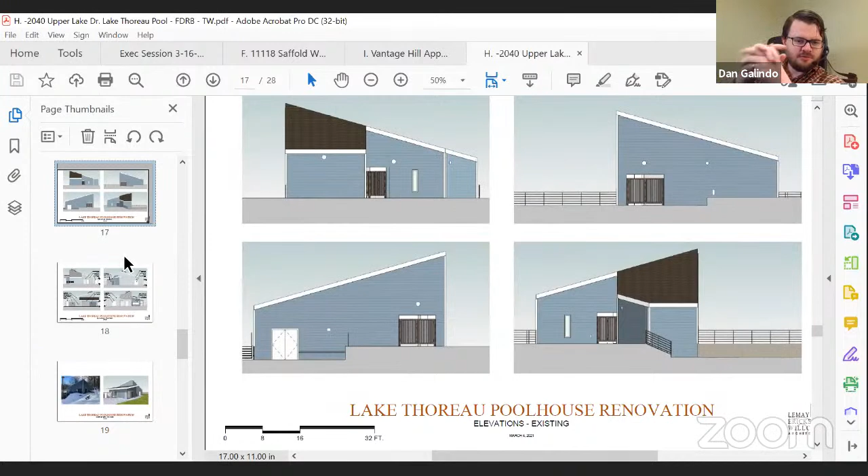I just want to ask a question about the roof. So on the addition, there's a small area where it comes back down, kind of counter to everything else going up and crossing, and I was wondering why that choice was made. Go to the next one with the new. Instead of maybe just carrying that roof line up, so that you'd have a little bit more dynamism between the two opposing angles.

I like it. Well, I don't think we're married to that little cant back down at all, so we're certainly willing to take a look at that. Okay, I'd recommend it. I think maintaining what you have now and doing that would complement the existing and the new at the same time. So that was my other one. Thank you.

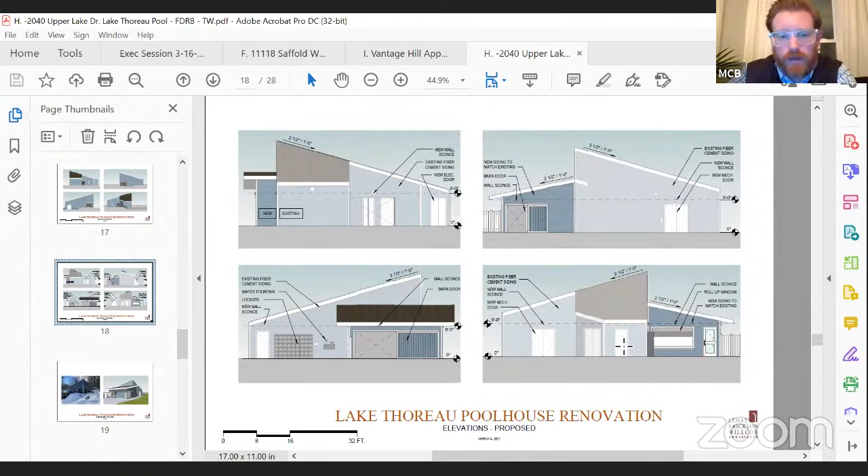Thank you. Any other further comments, Michael? Did you have a comment? Nothing, just a question. I'm excited to see the finished grading plan. And Scott had brought up and discussed the overhang that I was curious about, what the plan was for that void space below, but the kayak storage and whatnot sounds like a good idea.

So I'm excited to see the final details. Okay, we're asked tonight for concept approval, and concept...

Is there... you've heard some things this evening, and so my question, particularly about several things, but the roof in particular, I was wondering from the applicant's point of view whether you would want to address that or have us defer to you to address those, or trying to get a sense of whether we could approve in concept, given, but have those things to be considered. How significant we think those are, that we could approve but in concept only, and have those things to be considered.

Yeah, this is really a question for the board. Bruce, I'm sorry, this is Larry. Yeah, so I think we asked for preliminary site approval essentially, and preliminary architectural. I think we're beyond the purely conceptual level. I mean, obviously we're at about 60% plan effort here, and this is based upon all the public input we've gotten. I think the comments about the roof, that's certainly something that Matt and his team can study and come back with those kind of details.

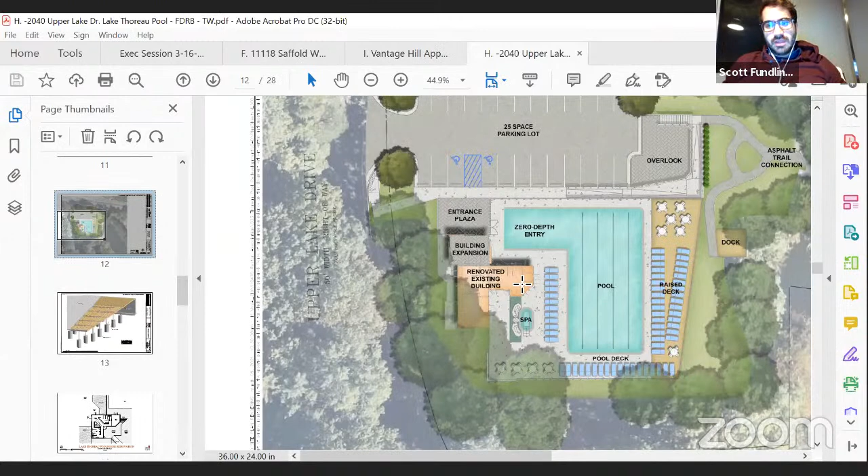I agree. I mean, the mechanical space isn't shifting, the location and footprint of the pool, the deck, the grading. It seems like the big blocks and design elements you guys have developed, we have no comments on them. It's mostly like, can you nudge a wall to align with the building expansion and maybe do something with the roof slope? Larry, is that a critical path item on your schedule?

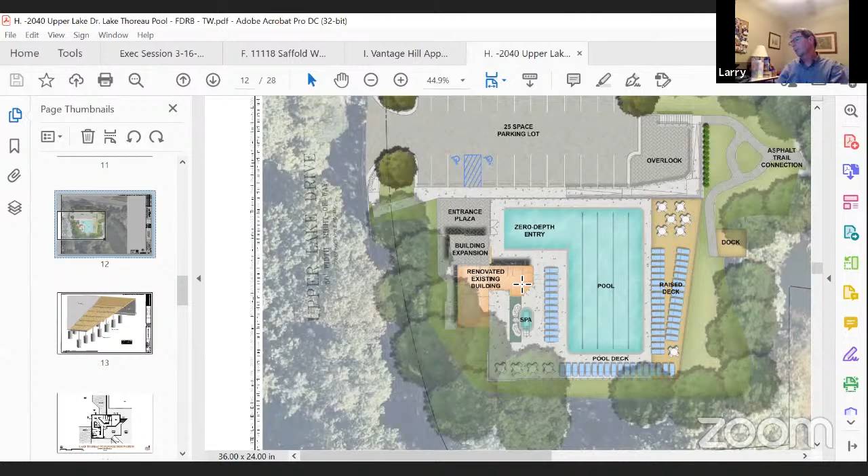I think as Lisa described it, it's essentially the same thing. We just, all the work we put into getting to this layout for the site, the shape of the pool, the orientation, one level grade, the ADA requirements for the parking lot, building, and so forth - it's those things we need to advance the design on to keep the project moving. So I think we can get that with the motion as stated, recognizing we've got to come back and address a number of the comments you all have made.

Yeah, I think we understand each other. Great. Dan had made that motion, amended his motion, and there was a second. I'll second again. Okay, thank you. Is there any further discussion from the board? Hearing none, all those in favor of the motion, please say aye, or raise your hand. Aye. Aye. Okay, I'm seeing no nays. No abstentions. The motion is passed.

Okay, thank you all. Thanks very much. Great comments and questions as well. Terrific, appreciate it.

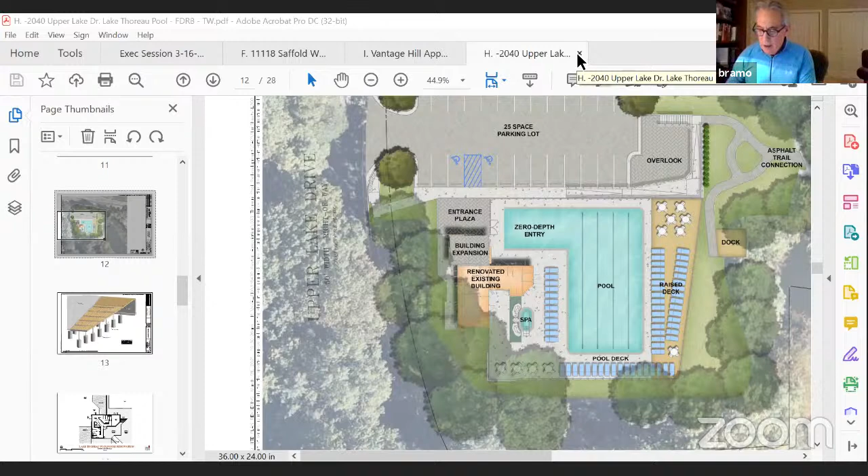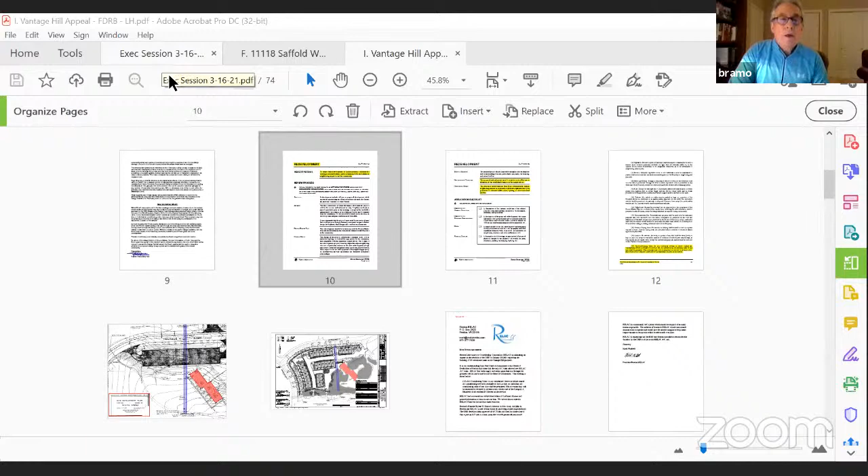The next thing on our agenda is a brief executive session. With that, we would be offline for a few minutes, and then return to hear the last item on the agenda, which is the Vantage Hill application, I guess it's an appeal. Is that understood for all our folks that are watching? So we're going to move into executive session now.

Do we need a motion to go to executive session? I move to enter executive session to consult with legal counsel. Thank you, Cam. Dan, I'll second that. Thank you. Any discussion? All in favor?

Aye. Aye. Karen, I'm not seeing Karen. Sorry, that's fine. Are you voting with the motion? Yes. Okay, thank you. Any nays? Hearing none, motion's passed, and we'll move into executive session.

Okay, everyone should have a little screen pop up that says breakout room. Now, do we select that? Yep, is that what we have to do? Go ahead, select that, Karen. Jane, could you move me in?